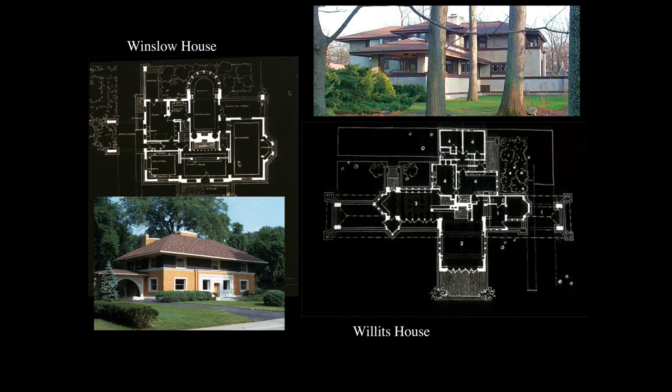One of the earliest buildings that we're going to take a look at is Unity Temple in Oak Park, Illinois. Oak Park is a suburb just to the west of the city of Chicago. This was the suburb where Wright built a house and studio for himself and for his young family.

And Unity Temple was a church for a congregation of Unitarians. Wright and his family were Unitarians. They were members of the congregation. And so when the congregation decided to build a new church complex for themselves, naturally they were going to ask a member of their congregation to design the complex. And so Wright took over the commission for the building.

And as a matter of fact, this is just a few blocks away from Wright's home and studio. If you go to Chicago today, it's possible to tour his home and studio, and it's also possible to tour Unity Temple. And I would highly recommend that. And if you get the chance, it's possible to walk the couple of blocks from one to the other and set up both of the tours on the same day if you're interested in doing that.

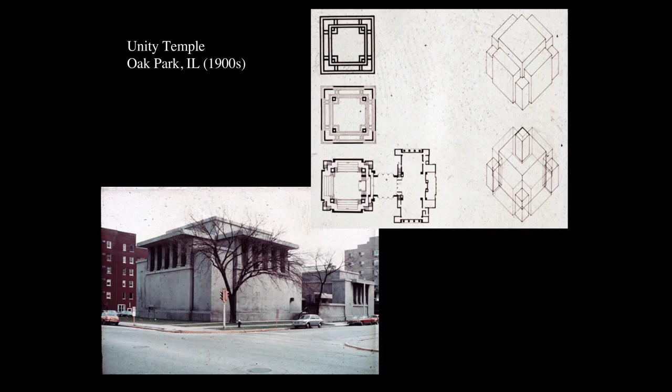One thing that I think is interesting to note here, though, is when we take a look at the precision and the repetition of the detail in those structural supports, we're going to see something that doesn't appear to have the imperfections that would show the hand of a craftsman in a workshop. Rather, we see something that is small scale, that is precise, and that is repeated.

And all of this begins to hint at a sort of industrial manufacturing that is a bit different from the hand-hewn, handcrafted details that we might see, for example, in the Red House or in the architecture of Greene and Greene. Here it appears that Wright is developing an aesthetic from some of the qualities that we would normally associate with industrial production. And so in perhaps a limited way here, we can see that embracing the machine in some of the architectural expression.

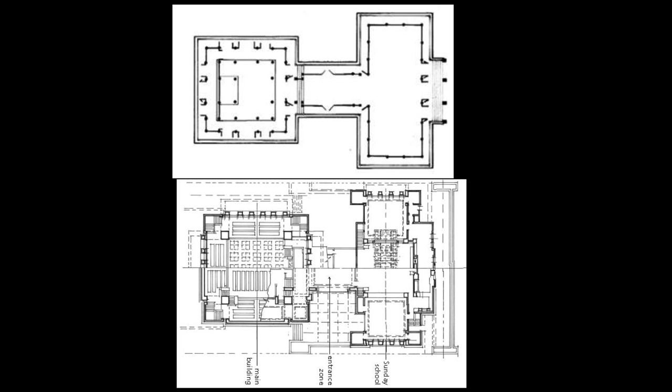If we were to go to the Buddhist temple, we would enter the temple from the right, go up those steps, and enter into an axial organization that would take us through those three different spaces. First into that transverse rectangular space, then through the transition space, and finally into what is the temple proper, what we would call the Hondo, where the devotional image is housed. And if we take a look at the complex, we see a sort of architectural expression that's very different from the shoin style that I've focused on in my lecture about Japanese architecture.

Here, it's a building that's built out of wood and that uses the bracket system of wood construction, but where the wood is not immediately seen because it is finished with all of these bright colors and bright materials. And so even though it is a point load system of wood construction, and even though we might be able to see the bracket system that holds it together, most of the wood here is going to be lacquered, painted, gilded, something very different from that other architectural tradition that I focused on.

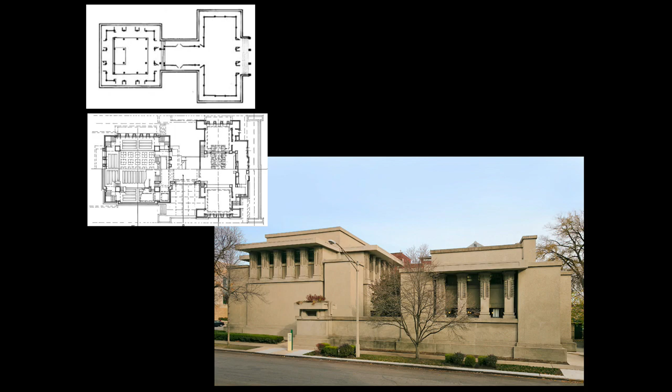But you might be able to make out from these different views the different parts of the temple complex, right? The entry area, the transition space, and then the Hondo proper. But if we were to compare and contrast that with the way that you enter into and move through the complex here at Unity Temple, we're going to see that for as much as Wright might have drawn inspiration from that Japanese temple, he's setting up the circulation through his complex in a completely different way. And we're going to see that he intentionally negates that axial organization through the different spaces.

In the Japanese complex, the destination is the Hondo. In Unity Temple that Wright designed, the destination is going to be the church proper, which is in the square planned area, which corresponds to the Hondo. But how you get there is going to be radically different in Wright's design. If we take a look at the photograph down in the lower right of this slide, by the curb, you may see a little sign, a little vertical yellow sign, and you may see a planter, which is sort of behind and above that, a planter which is at the end of a little retaining wall.

Now, if we were to find that planter and the retaining wall in the plan of the building, you might see a couple steps that are directly above that planter in plan, okay? That planter hides the steps from view in the photographic image, but you would have to go up those steps onto a terrace and then into the intermediary area. And then from there, you would either go to the right or you would go to the left. To the right would be a community center, a public space for the congregation. And then to the left would be the church proper.

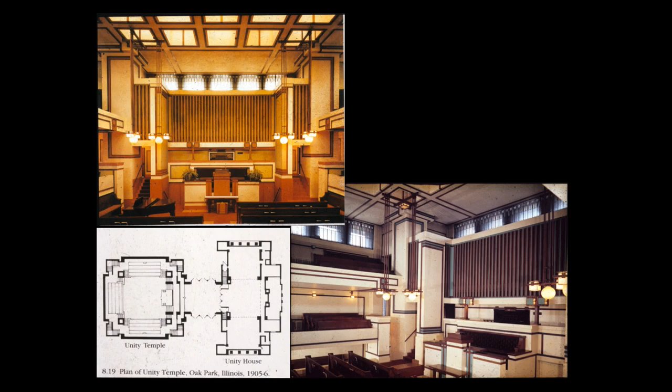But even if you went to the left and wanted to enter into the church proper, even from that intermediary space, you would not be able to enter axially into the space. Rather, from that intermediary space, you might hang a left to get into the church proper, and you would come up against a wall. That wall is to the back of the choir, which is to the back of the pulpit. And when you hit that wall, you would either need to go to the right or to the left. And when you do, you'd find yourself in two of the corners where there are a lot of stairs that are organized. And from those corners, you could descend down into the pews that are at the ground floor area of the church proper, or you could ascend to some of the balcony spaces where there are additional pews.

But let's just take a look for a minute and let's be cognizant about how complicated that process is to enter into the complex and to move into the church proper. Again, negating any sort of axial organization of the circulation through the whole thing to your destination in the church proper. Rather, you need to sort of rotate around the planter to come up to the terrace, move into that intermediary block, go to the left, face a wall, decide to go either to the right or to the left to the corners, and then down steps or up steps to find your way into the area where the pews are located. That's a pretty complicated little way of moving around this complex. And it is something that is not without significance when we think about the history of religious architecture in Western Europe and in North America.

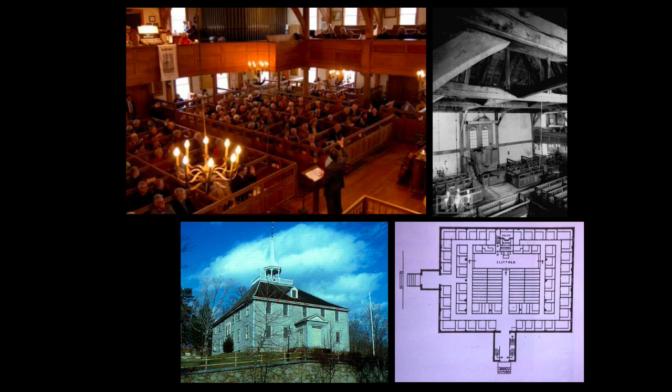The Calvinists and the Protestant reformers, the radical reformers, completely rejected any sense of sacred space. And that's evident in the architecture. And this was what was imported into the colonies in New England. Again, Puritan separatists who felt like the Anglican Church or the Church of England did not go far enough in the Reformation, and who reject completely the notion of sacred space. And when they designed and built buildings to house their worship services, they didn't even call them churches.

In their view, the architecture was not enclosing sacred space. In their view, the building itself had no architecture that was intended to glorify God or do any of the other things that the Catholic churches did. This was just meeting space, and this is just where they happened to worship. The building did not represent the church or the body of Christ in any way, shape, or form. This was the tradition out of which the Unitarians developed and grew in New England.

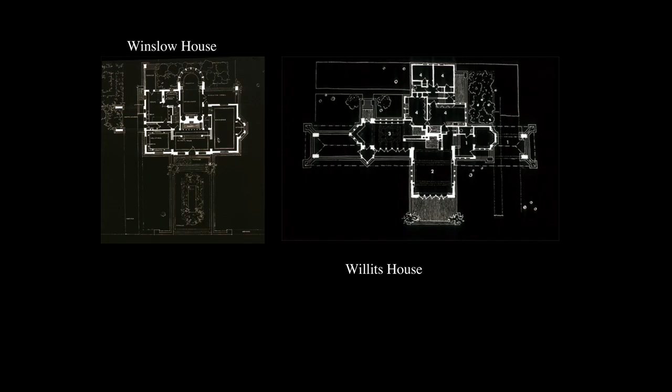Now, the next building that we're going to take a look at, the Robie House, is obviously an example of domestic architecture. And so let's take a look at some of the things that Wright considered to be important in domestic architecture, specifically by taking a look at these two examples, the Winslow House and the Willits House. One, again, an example of that sort of cubic solution, the other a more planar solution, but both houses built around the Chicago area in the 1890s, in the 1900s. In the Winslow House, one element that is really strongly expressed here is the roof.

That structural element that sheds water and snow and that protects the interior spaces. And here it is a pretty basic geometric shape, basically this rectangular plan pyramidal shape that is really carefully separated from, distinguished from the bulk of the building, which can be considered the rectangular volume on the ground floor of

the Winslow House. And because the second floor here is set up with voids of the windows or with walls that are painted dark and so sort of recede from view, it appears to be this element hovering over the house proper. And so for Wright, designing residential architecture in a climate that is for many months going to be chilly, if not really cold, with a lot of rain, a lot of snow, the roof is going to be one essential element of domestic architecture.

Another element that was essential in Wright's domestic architecture, if we take a look at the plan of the building, is going to be the fireplace. And in this particular case, we can see that the fireplace is the core of the building, pretty much in the center of that rectangular plan. And whether physically or sort of representationally, it is the element that provides heat and creates the inhabitable interior spaces for the house.

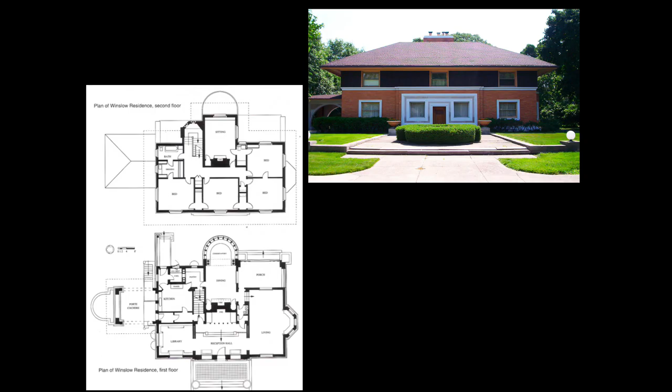But let's take a look at how Wright is setting off the fireplace in the Winslow House, specifically in the reception hall. Here, if we imagine walking through that front door, we enter into a reception hall that in plan is sort of a sideways rectangle.

Directly on axis, straight ahead of us, we can see a few steps up, and there's this upper landing that is set off from the lower part of the reception hall by these two large plinths, these two banisters, that connect to banisters that go to the right and to the left and sort of protect you from falling off that elevated platform.

Directly on axis, set up as your destination, is the fireplace itself, but he's setting up this seating area close to the fireplace that was called an inglenook, something that we can see in a lot of arts and crafts architecture at the time, and something that comes from the vernacular architecture of cold climates. Often people would have these smaller contained little sitting areas close to the fireplace so that during the colder months you could actually get physically close to the fire and sort of sit down and enjoy the heat.

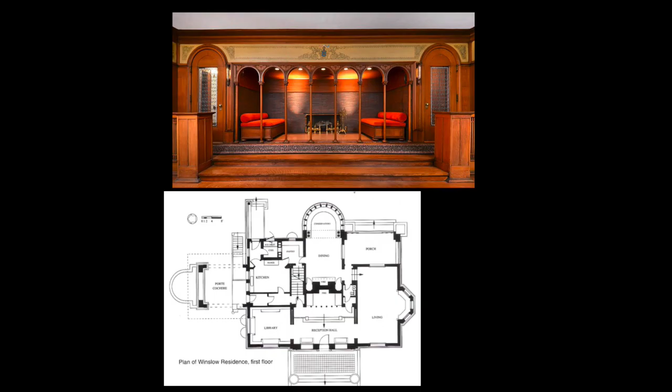He's doing that here, but the inglenook is symmetrical along that central axis, and furthermore it is separated from other parts of the reception hall by that colonnade. What he's doing here is drawing from sacred architecture. Kind of interesting, considering that the church that he designed at about the same time avoided some of the aspects of sacred architecture. But here we see him setting up something in the Winslow House that draws upon religious architecture.

We can see the central axis, the symmetry about the axis, the destination being the fireplace and that space around the fireplace, and separating it from the rest of the space with something that is very much like a rood screen, which we might see in Anglican churches or still remains in some Catholic churches, but often it's mostly monastic churches. But in England, a lot of the rood screens survived, surprisingly.

And if we take a look at these historical examples of sacred architecture, where there was this notion of sacred space, and these were design elements used to sort of create zones within sacred space, when we see Wright using similar elements and similar design principles here for the inglenook, we know that he was using these elements to set up a sort of sacred space within the home.

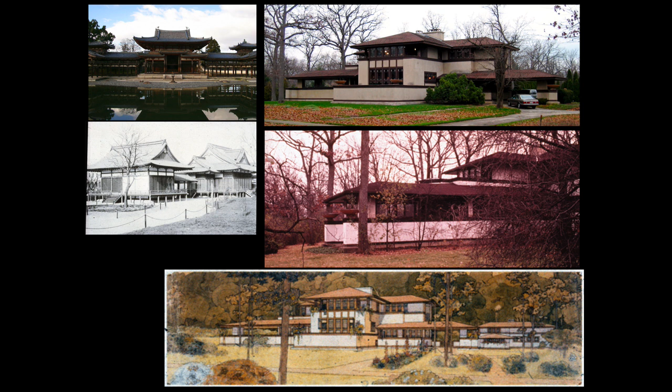If we take a look at the Willits House, we can see a very clear reliance upon the shoin architecture, or the traditional timber construction in Japanese architecture that I spoke about, and of which there was an example constructed for the World's Columbian Exposition in Chicago in 1893, the Japanese pavilion. On the left, we can see it in that black and white image.

Wright was in Chicago in 1893. We can assume that he saw the Japanese pavilion, and he, like many arts and crafts architects, was inspired by what he saw here in that traditional architecture of Japan. And so in the Willits House, we can see a reinterpretation of that. Moving away a bit from a very close reliance upon the Japanese tradition, but still something inspired by that.

And one of those aspects of the Shoin style architecture, the Japanese tradition, was the space that they achieved with those movable shoji screens. One interior space could be separated from another or opened up. The interior could be opened up to the exterior. That was a flexibility and a flow of space that was very different from what we see in traditional Western architecture. And that's something that is going to be a real important point of departure and source of inspiration for Wright's architecture, even during these early years.

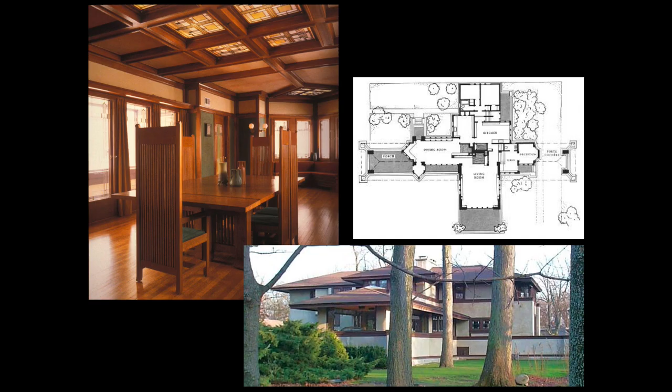If we take a look at the Willits House, specifically the dining room and the porch, we can see one rectangular two-dimensional plane extending away from the fireplace core, which is what holds down those different extending planes in the pinwheel plan, right in the center. But we can see one of those two-dimensional rectangular planes extending away from the fireplace core, setting up the dining room and the porch, where with those windows, there was a lot of connection between interior and exterior.

The floor surface and the ceiling in the dining room visibly connected to the floor and the ceiling of the porch outside, with a little variation, but it was being expressed as the same space that just happens to be within the building envelope in the dining room and then outside the building envelope in the porch.

Now, to our eyes, this doesn't look that radical, right? To our eyes, seeing this much glass and this connection between interior and exterior and that sort of extension away from the building, to our eyes isn't that radical. But this is the 1900s, and this was highly unusual. This is something that was not seen before. And Wright's even going to go further than that.

If we take a look at the plan of the building, and if we can identify those four rectangular two-dimensional planes that are extending away from that fireplace core, conceptually those planes overlap as they come close to the fireplace core. And what we see happening in plan where those planes overlap is that a clear definition of the corner is beginning to get broken down.

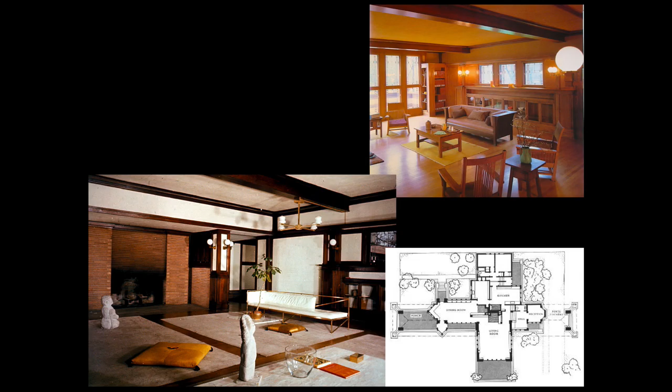Let's take a look at the interior of the living room at the Willits House. If we look at the exterior corners of the living room, which is in the image up on the upper right here, we're going to see that the corners still exist, right? We can see where one wall comes to the other. There's a built-in bookcase there in the corner, but the corner still exists.

If we turn around and take a look at another corner within that living room, specifically the corner in the plan, in the upper right, the corner that's connecting the living room with that entry sequence. And if we take a look here, we can see that fireplace, but the corner is dissolved.

The corner of the space in the living room is not being expressed because the space sort of meanders through that opening into the upper part of the hallway and from there into the kitchen wing and into the entry wing. What Wright is doing here is he's beginning to pull apart the corners of the spaces. He's beginning to break down the strong definition of the interior geometry, which had become part of the tradition in Western architecture.

Again, to our eyes, this view of the living room in the lower left isn't all that radical, right? But back in the 1900s, in a building that was designed and built by a trained architect, somebody who should know how to define a basic geometric interior volume, to have the corner begin to break down like this was something that was truly radical.

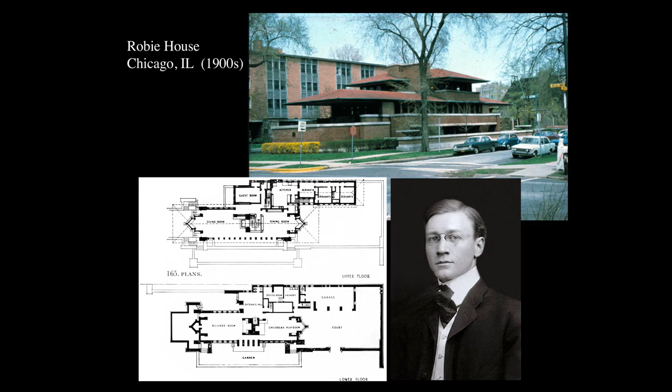And if we take a look at the plan, we can see that the fireplace is in the middle of one of those rectangular planes. And conceptually, the fireplace is kind of nailing down the corner of the other parallel rectangular plane, which again is just a little to the upper right in the plan of the building. And so these two planes are sort of coming together and being held down by the fireplace core.

The architectural expression that we have here for the building certainly draws inspiration from traditional Japanese architecture with the low pitch to the roofs and those deep overhangs. But there are a couple of ways in which this draws inspiration from the landscape, specifically the fact that so much of northern Illinois is just the eastern edge of the flat prairie that runs all the way to the Rocky Mountains. And so that reiterated horizontal line that we can see here in the composition is sort of picking up on that horizon line, the flat surface of the earth, and sort of reiterating it here in the design.

Later, Wright is going to talk about this building as if it is a ship plowing across the prairie. So instead of moving across the flat surface of Lake Michigan, which isn't that far away, here we have a boat that's sort of plowing across the flat surface of the prairie. And that horizontal is going to be something that gets picked up by the stone coping, which is at the top of any of the brick walls. It's picked up by the eaves of the different roof lines. It's going to be a major element in the composition of the building.

We can see this balcony wall and the retaining wall down on the ground floor that are sort of these horizontal stripes. And it was something that Wright brought even down to the details. He required the masons, the guys who are building the brick walls here, to use two different colors of mortar. One, which is your typical light gray mortar, which was being used for the horizontal joints between the brick. And then another color, which is going to have some aggregate or some addition to the mortar, which is going to give it a slightly pinkish tone for the vertical joints between the brick. And in this way, the horizontal joints are going to jump out differently than the vertical joints.

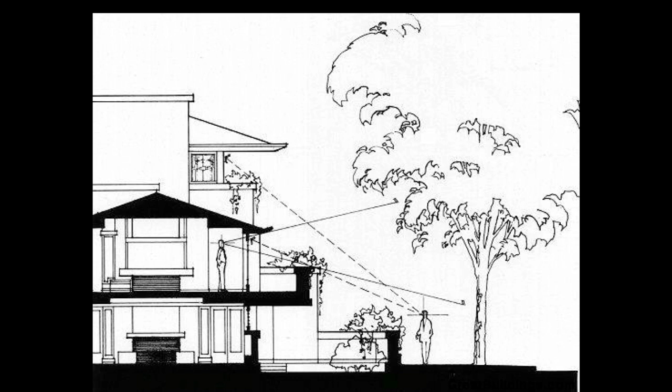In many ways, those parapet walls, whether they're retaining walls on the ground floor, or whether they're balcony walls on the upper floor, were organized also to control the sight lines into the house, because the house was going to have to be pretty close to the sidewalk, and in order to maintain the privacy of people in the interior spaces, they really needed to think about these sight lines. And those balconies and those parapets there, in part, were designed to provide some privacy to the inside.

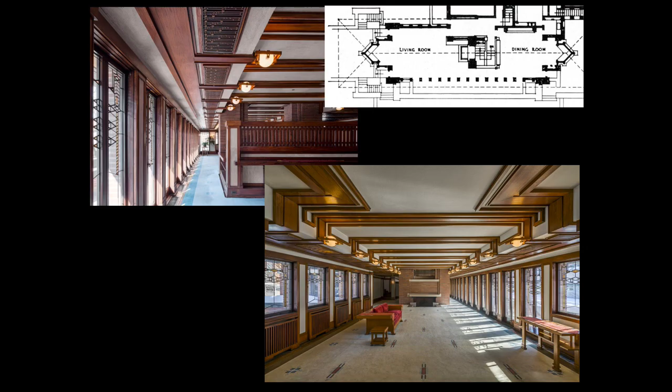The way that you enter into the house is a little bit convoluted here too. You don't enter from the wide elevation of the house that faces the street. You don't enter from the narrow elevation that faces the side street. Rather, you have to walk around the end of the building to the back, go down a few steps, and enter into this lower level entryway through the doorway. And then from that doorway, if we take a look at the plan, you enter into a space that connects to the fireplace core and the vertical circulation through the building, the vertical circulation that is specifically for the patrons here, for the family itself, which is in a connection to the fireplace core.

And if we take a look at these two views here, you can see that fireplace core down at the end of the living room. And from the other end, from the dining room, you can see the way that that staircase is enclosed with a little bit of built-in furniture here.

But what's interesting is the way that there are no corners to the living room or the dining room. Rather, the space just continues on either side of that fireplace staircase core. And so the living room continues into the dining room, breaking down the corner, no longer having that clear definition of interior geometry that we see in traditional Western architecture.

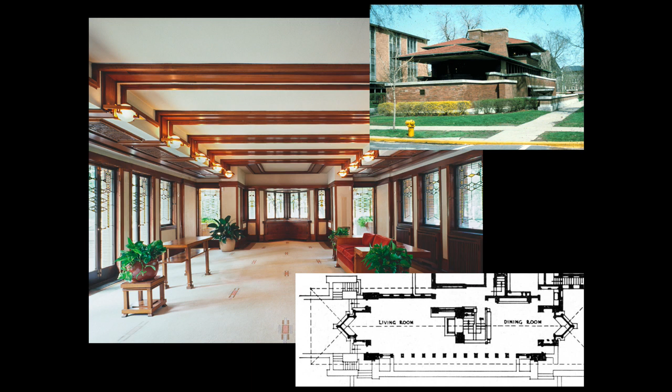Furthermore, with all these windows, you can imagine that the connection to the exterior terrace, or on the floor above, the connection to the balcony is going to be great because of all of this glass. And down at the end of the living room, through glass doorways that also remove the corners from that end of the living room, you would connect to this exterior terrace covered by this enormous overhang.

And here we can see once again Wright embracing the machine. In order to structurally support the roof up above, Wright is going to use steel in the house. This is interesting for a variety of different reasons. First of all, it's often considered to be the first use of structural steel in an American residence. Whether that's actually true or not, I don't know, but it's certainly an early example of steel used in these buildings. And it shows what Wright was willing to do with industrialization, technology, and the machine.

Rather than turn his back on it, he was interested in exploring what these new materials were and what they could do. And if it allowed him to have this enormous cantilever, this enormous overhang, and create this interesting connection between interior and exterior space, then he was willing to do it.

Right? Furthermore, if we come in and take a look at the details here, specifically in the stained glass windows, once again, we can see the inspiration coming from some of the local flora, in this case, wheat. If we take a look, we can see the composition there in the wheat heads, right? But it's being designed and produced with a size of the detail and a precision of the detail and a repetition of the detail that begins to suggest manufacture, not a craftsman in a shop doing things by hand, where there are going to be imperfections just from the manufacturing of the glass and the way that the glass is leaded together.

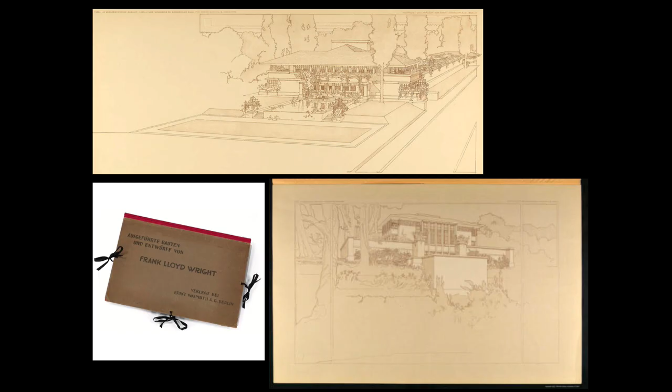This was made popular, and this was also demonstrated to the world in a publication known as the Wasmuth Portfolio. In 1912, 1913, 1914, Wright and a publisher in Germany were collaborating on a publication that was going to be widely available in Western Europe, and that was going to be a series of illustrations of Wright's architecture.

But it's that space and the way that Wright is breaking down the corner that is going to have a very profound effect on a small number of European architects in the years following the publication of the Wasmuth Portfolio. 1914 was a pretty tricky time to have a publication come out. World War I is going to begin, and for the following 4 years and a few years afterwards, the war and reconstruction after the war, getting things back in order, getting the economy back after the war. It's going to take a while before we begin to see the full effect of Wright's spatial examination.

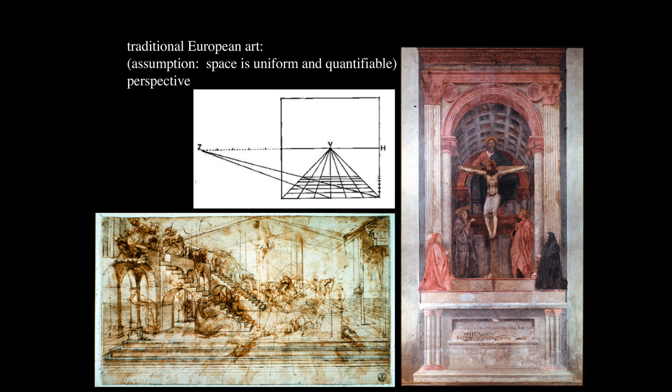Okay? But with some of the scientific discoveries that we see through the 1700s, the 1800s, into the 1900s, scientists are going to begin to question those assumptions. Is space really uniform? Is a particular unit usable in spaces on the planet as well as throughout the rest of the universe? And what we have is a hypothesis that begins to become commonly known in scientific circles and eventually published, this hypothesis that time and space are not uniform and that movement through space is going to warp time and is going to warp dimension itself.

One of the greatest theories that came out of this was Einstein's theory of relativity, right, where time is not uniform. But European artists are going to begin picking up on this and exploring what does it mean if time and space are not uniform. And we can see some explorations of this in what we can call Cubist art, where they intentionally show multiple viewpoints. In other words, there is no one viewpoint looking into a perspectival scene, even though that may correspond to the way that we kind of see things in the world. I mean, that's the way I look at the world.

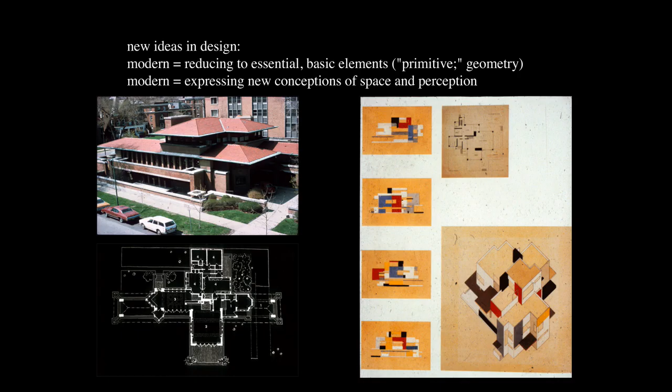De Stijl was a Dutch movement from the 1900s, sort of a collaborative effort of a few different designers and artists who wanted to find the way forward into modern art and architecture by going back to the basics, primary colors, basic geometry, point, line, plane, and looking to use them in ways that is going to give form to new conceptions of space and perception.

And the great architectural example of that is going to be the Schröder House, designed by Gerrit Rietveld, one of the members of De Stijl, located in Utrecht in Holland from the 1920s, okay? So from the decade after the conclusion of World War I. Interesting commission. There was a young woman who was recently widowed and had 3 children, and she decided that she wanted a residence for herself and her children that was going to be non-traditional in a variety of different ways.

The site that she had available to her was at the end of a row of houses in Utrecht, so a very standard site, a very standard neighborhood. Row houses were just common in Utrecht and throughout Holland and much of Western Europe at this point in time. And she happened to have the end lot, which meant that the architect had the opportunity to not only design a front facade, but a variety of different elevations for the building.

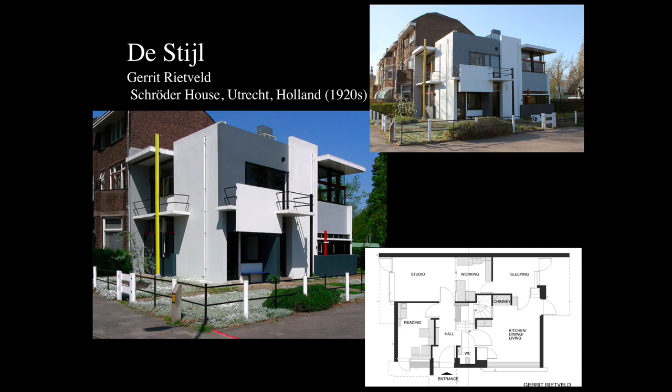In terms of the programming, this young woman wanted the ground floor largely for herself and the upper floor largely for the children. But especially in the children's area, she wanted a great degree of flexibility so that the children could really explore how they wanted to go about their lives. If we take a look at the ground floor of the building here in the lower right, we can see the reading room for the young woman, her artistic studio, her workroom, her bedroom, right? Kitchen and dining, living area for the whole family.

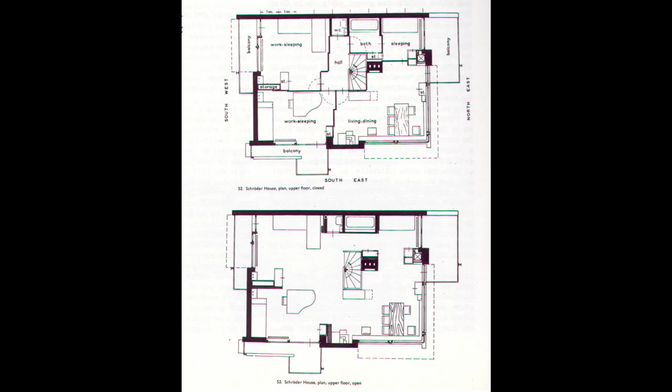And we can see individual spaces, a hallway at the top of the staircase from which you can get into the bathroom, and then into the living dining room, a work sleeping area connecting to another work sleeping area and another sleeping area, right? But down below, we can see what it's like when all of those partitions are open. And rather, we've got one, well, not particularly large, but one space that is kind of subdivided by a few different things, by the staircase, the little fireplace, right? But open, where one space is going to flow into the next, where there is no separation of living from sleeping, from working, not even from bathroom if you don't want it, right? But it allows the children to explore how they wanted to go about their lives.

And all of this is being organized in basic geometric units: point, line, plane, primary colors, red, blue, yellow, black, white, gray. But take a look at the way that one space connects to the other space on the inside, and the way that one space flows out through those windows at the corner. There is no strong definition of the corner like we might expect in traditional Western architecture. The corner is completely broken down. Much of the wall is completely broken down. And the interior space visually connects to the exterior.

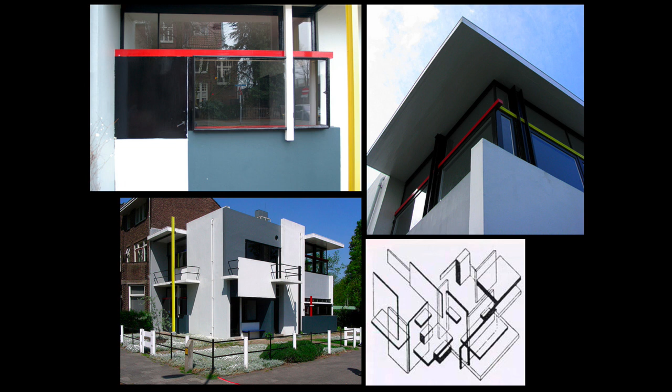And there's a pretty close connection between the interior ceiling and that exterior extension of the roof plane just outside the windows. And so the space continues out. It's just that in some areas you're within the building envelope. In other areas, the space is outside the building envelope. So here we've got a great exploration of new concepts of space and time in architecture.

And the flow of the space has some connection to, some inspiration from what Wright had started, perhaps more timidly, but what Wright had started a couple of decades prior in some of those residences in Chicago.

Now, I need to be very clear about what I'm not saying here. I'm not saying that Wright intended this sort of architecture. Wright certainly didn't do architecture that looked like this in the 1920s. That leads me to think that he didn't want to do architecture like this in the 1920s. Perhaps some of the basic conceptions that these artists were using were a bit beyond where Wright was at the time, right? Perhaps. But what I am saying is that the sort of exploration that Wright began with breaking down the corners and connecting interior to exterior in some of his residences is picked up and taken to a further extreme by these designers. Okay?

And if we take a look at the outside again, point, line, plane, and take a look at that corner window of which we took a look at the interior. And you can see that the roof plane just extends out and the glass dematerializes the corner and the views just extend out, and it's just a transparent building envelope that is separating the interior from the exterior. And you can see how far they're going.